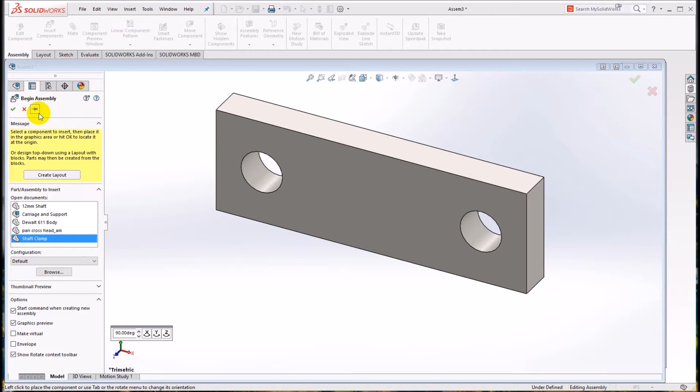The first thing I'm going to place is one of the shaft clamps, and a teaching moment here: if you want to place multiples of an item, see this keep visible pin. When I click to place one, it is still in placing mode, so I can put another one in. Notice the cursor changes, and I right click to complete the operation. So now I have two of those, and they're not oriented at all.

Let's continue the process. I'm going to insert a couple more components, the two 12mm shafts, and again click on the pin so I can get two of them without doing it twice. 1, 2, right click, and done.

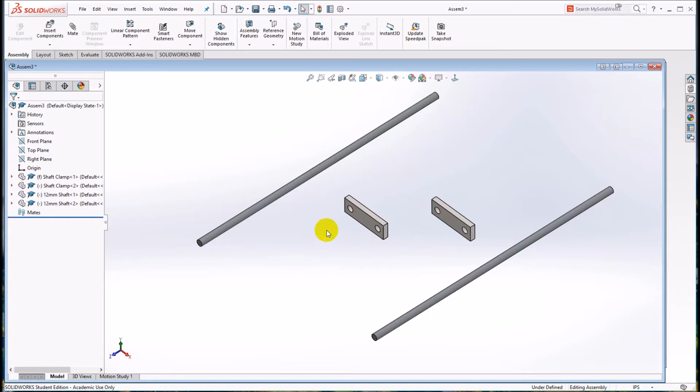So let's go ahead and create the first mate constraints. I know I want these to pass through the two blocks, and I want the blocks spaced out a certain distance from each other. Let's do the first block. I'll go into mate, scroll in a little bit, click on the outside, then find my way into the inside.

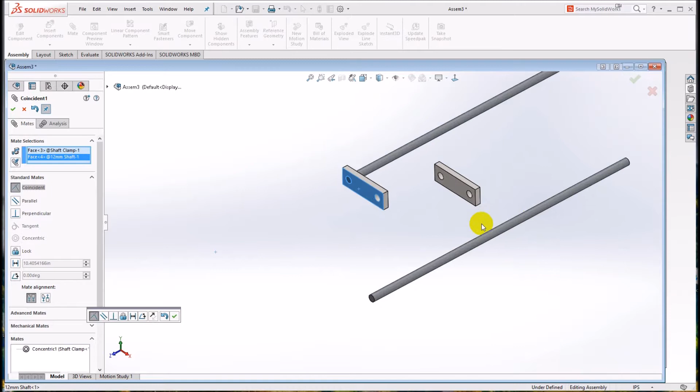Now they have a concentric relation, and I will accept that. It's waiting for me to do more. The next thing I want to do is make this edge coincident with the end here. They now are, I will accept that. Next, here with here - I don't feel I need too much dialogue here, you can watch as I do the operations.

Let's get to the end here. So now I have that part ready. Let's accept that and continue with the other end. Now, I know because I created this that the dimensions will work, but I want to work per the worksheet. So if we go to the second page, there's a distance relation between the insides - between the inside surfaces.

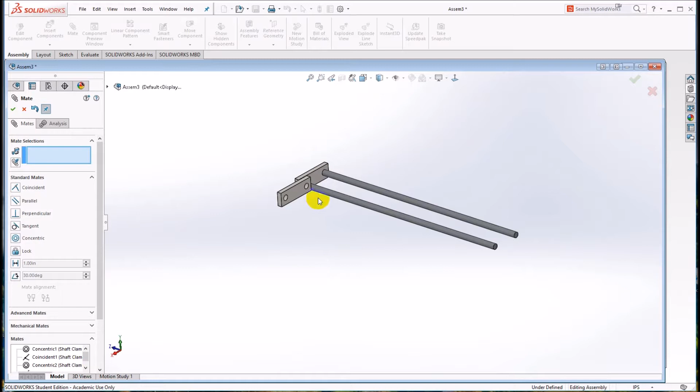First off, let's get the concentric constraint set up. That is concentric with that. I'll accept it - notice I can still rotate. That helps because now I can click on that, and it's lined up with the two shafts, but it's movable, which is fine.

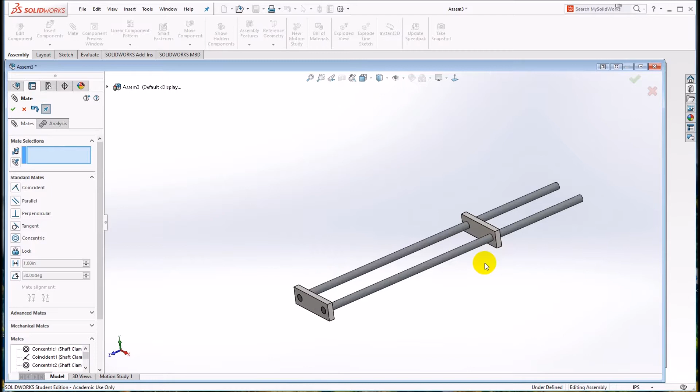Let's set up a distance constraint between here and here. Right now they start out coincident, and according to the worksheet it wants to be 488.95 millimeters, which brings it out to the end. So I've got a good starting point.

Let's continue with adding items we know are part of the assembly - there are the slide bearings to bring in. So let's go to Insert Components, and it looks like I did not open that already. I'll go find it, give me just a moment here, I've got to find it.

It's in my Google Drive. I've got to hunt it down. Apologize for the delay - sample assembly, and I should find the slide bearing down here. There it is, it's a SOLIDWORKS part.

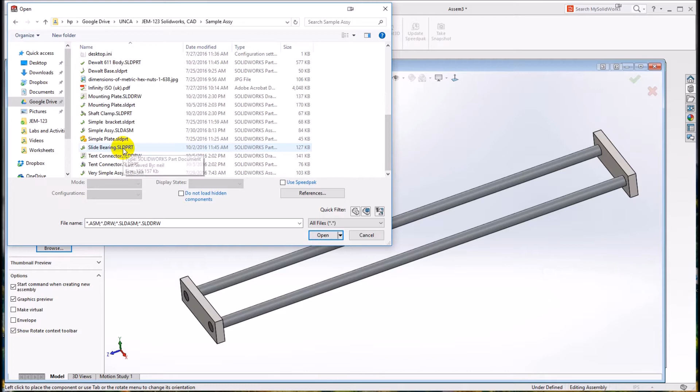Double click on it. Now again, I want 4 of those, so I'll click on the push pin. 1, 2, 3, and 4. Right click to finish - now I've got the 4. Let's start to constrain these on the shaft.

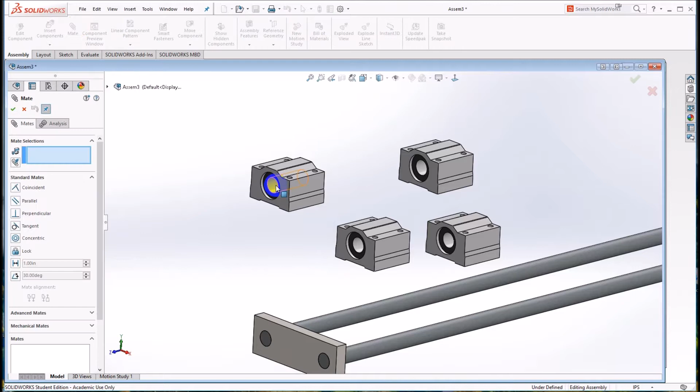So I click on mate, the inside, and the shaft. Now they're concentric, I'll accept that. I'll show you a shorthand for accepting in a moment.

Click on this guy, and the shaft, and notice I can choose other mate constraints. It happens that concentric is good, so I'll click on the checkbox. I'll show you one more accelerator, there and there - if I don't move, notice the cursor shows me the right mouse button will accept it. So I'll do that, and we got one more to do - that guy with that guy, accept it.

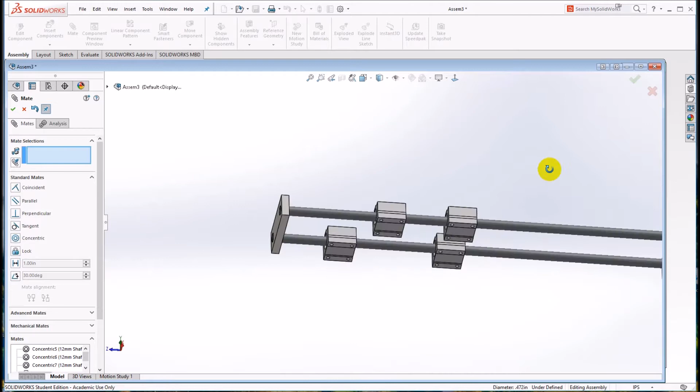So you can really work pretty quickly through this. I know that I want these all to be coincident - the face of that coincident with the face of that, and so on. I'm going to set that up right now. That with that, it's already selecting coincident. I'll accept it. This one with this one, right click. And this one with this one, right click. So they're all coincident.

So there's a dimension between the outside of the slide bearings, from here to here. Right now it puts them as coincident, but in fact I want a distance, a control distance, and that is 116.281. If you're wondering where these came from, they were probably English dimensions that I converted to millimeters.

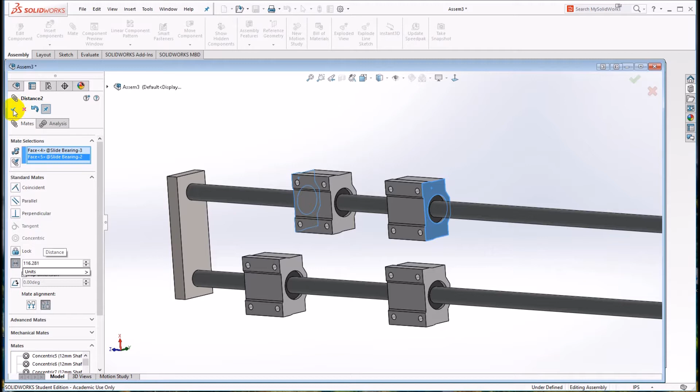So I'll accept that. Looks like I made a mistake - let's go back and fix that. Here we are, I neglected to say millimeters. So I'll go back and say mm. Should bring it back into the picture, which it does. So easy to fix error.

Now you might think that I need to now do the same thing with the bottom two, but by giving a coincident constraint between here and here, now they're lined up, and between the other pair, here and here, I'm done. So now, if I come out of here, they will move as a unit, so I've already got the first part of this assembly ready to use.

I'm going to stop here and then I'll continue in just a moment.

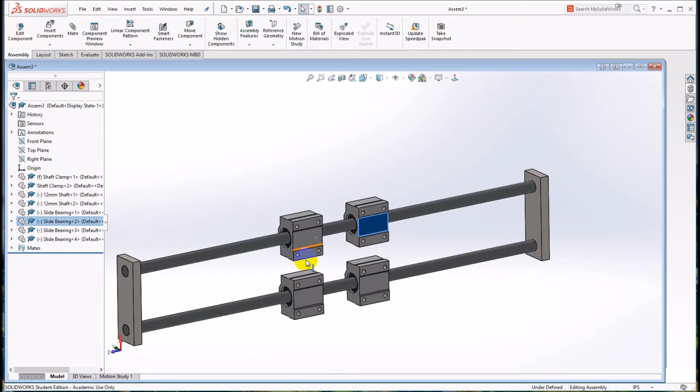Alright, continuing on, let's bring in the DeWalt router and orient it, locate it such that it is where it needs to be per the design.

I'll go to Insert Component, and there's the DeWalt 611. There's only one of them, so I won't bother with the pin. And of course it comes in oriented in a fashion that is not particularly helpful.

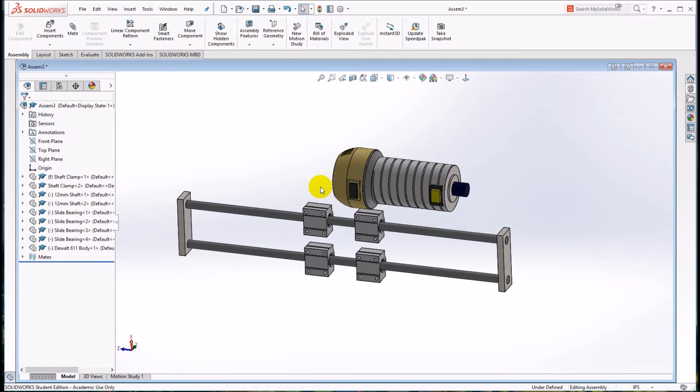There are any number of ways to get this located properly, so don't take what I'm about to show as the definitive method. It's just a method.

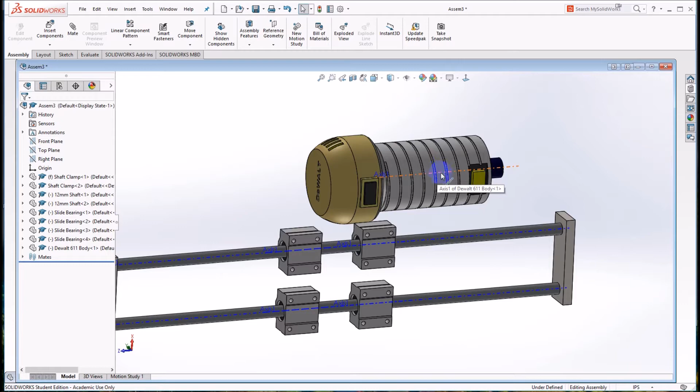Now if I go up to visibility, you'll see that if I turn on view axis, that in fact I can see that because when I designed these various parts, I put an axis. You can see it in blue here. There's an axis for each of the shafts, and there's an axis for the DeWalt itself. You can also see that there are some flat surfaces on here. There's a flat down here.

I think what I'm going to do is to start to orient the router so that at least it won't try to tilt on me when I do some of the things I'm about to do. So I'll go into Mate, pick one of the flat surfaces on the bottom, and I know because it's a fairly simplistic design that I want it to be parallel to the flat on the slide bearing.

I could have picked other surfaces. This is just a convenient one.

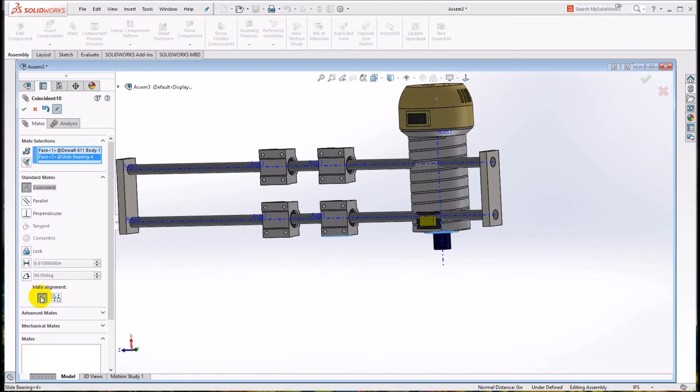Now let me change my mate alignment because it's upside down. I want it to be this way, and I don't want coincident. What I want is parallel. Sometimes SolidWorks undoes things, so there we are. We're there now, parallel, and that's all - no other control. So I'll accept that, come out, and you'll see that now I can move this.

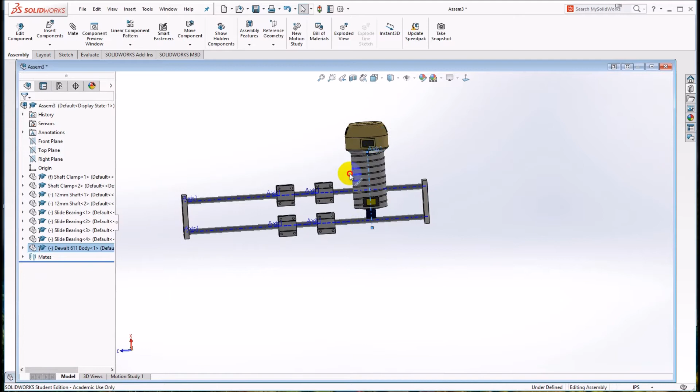I can move it left and right, pretty much any location I want to. I'll get it approximately oriented the way it ought to be. And I'll zoom in a little bit. You can see that it's kind of where it will eventually end up.

So let's add another constraint, again referring to one of the diagrams. It shows that the distance from the center line here to either of the axes of the shafts, for example, that there's a certain distance. It happens to be 57.150 millimeters.

So I will add a mate, and it'll be a distance mate. It'll be between here. I'll go right to distance, and I'll click on one of these. Right now it's just set for 1 inch, but I'll punch in 57.150 millimeters, and now there it is, located in a fashion that is useful.

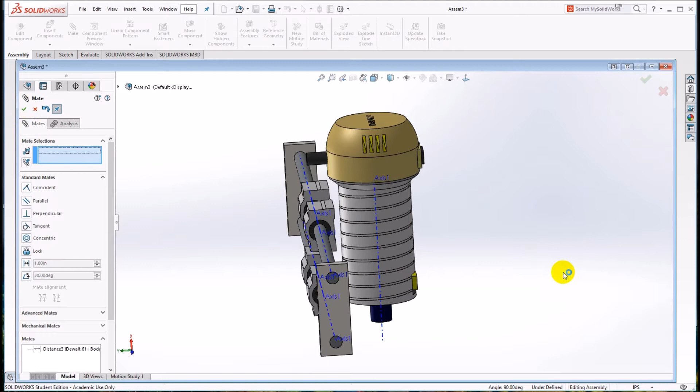So I will accept that, and I'm not quite done. I mean, there's a couple of other ways that this can move. You see that it can move left and right, it can move up and down.

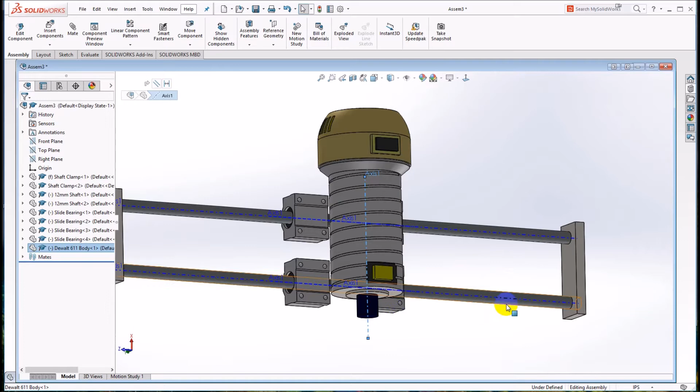I see that there's a vertical dimension of 93.142 between the upper shaft and one of the bottom flats, this big flat on the bottom of the router.

So I'll go back into mate, click on, I'm waiting for it, let's clear this, I don't want it automatic, and I'll click on this surface. That's one of my references. I'll click on distance, and it's the axis here.

Right now it's just 1 inch below, but what I really want is 93.142 millimeters, so I'll enter 93.142 millimeters, and I accept that.

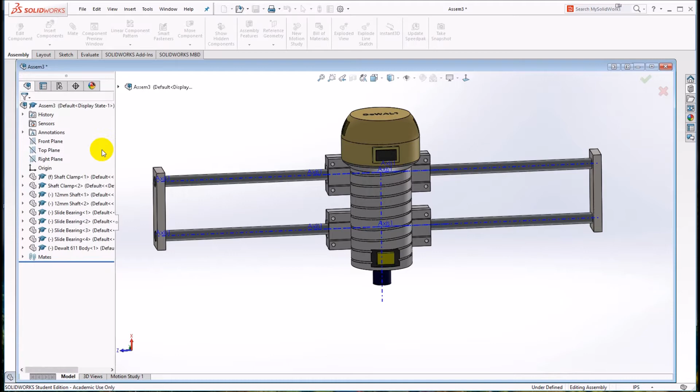So now I have a vertical orientation. Remember that there are several degrees of freedom. I haven't done the left to right, but I have the up and down, which is now locked. Notice if I try to tilt it, or move it, it just tilts, and I can't pull it away.

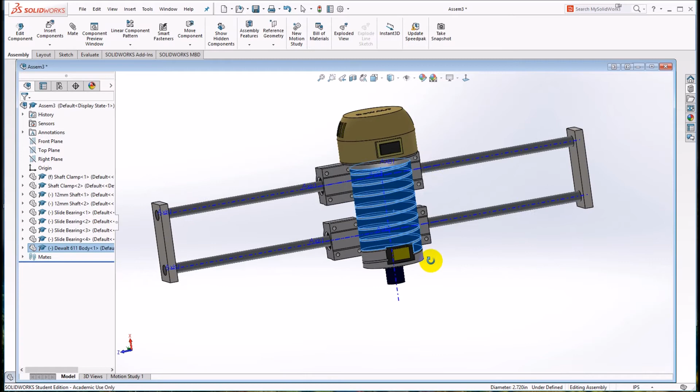So I'm nearly there. Here's where we begin to need a reference plane that bisects the slide bearings. So I'm going to go ahead and create it.

I'm in assembly. I'm going to create a reference geometry or a plane, and that plane will go, let me clear this out, I don't want anything in there. Alright, it'll be between here and here. So there'll be a bisecting plane, and that's useful.

I will leave it selected. Notice it's currently selected, you can see by the appearance of the handles. If you click away from it, notice the handles go away. In fact, I can't even see the plane at all.

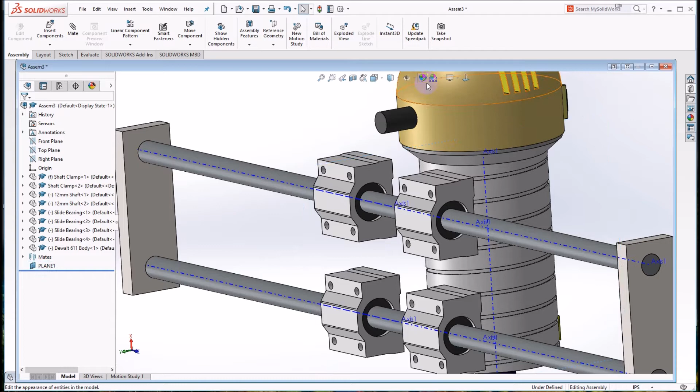Now I can find the plane over here in the feature tree, by clicking on it there. Or I can go back into the visibility section and turn on plane visibility, in which case every plane becomes visible. Let me turn that off. I think it was actually a little easier to just pick the plane here.

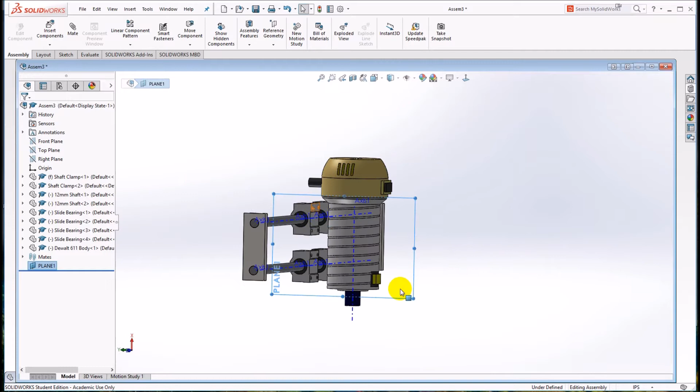So I've selected the plane, and what I'm going to do is to make that plane and this axis coincident, that axis lives on that plane. So I'll do a shift, left click, and up comes the accelerator.

I can do things. One of them is coincident, and that's the one I want. So I'll click on coincident. I don't know if you saw it, but it moved the motor, and so now finally that router is completely and accurately located, ready for creating the new parts.

So I'll stop again here.

This is an apt moment to remind you that in-context part information is saved within the assembly file. Therefore, you must save the assembly file now before creating any in-context parts. Otherwise, serious problems will occur, relations will break, etc.

Alright, continuing on, I have the router mounted as I want it, and I want to create a new part, the mounting plate that will be flush with and aligned with the slide bearing.

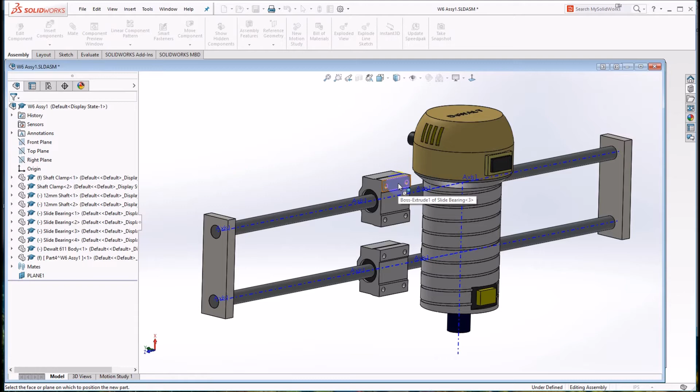So I'll go into Insert Components. Instead of inserting a component, I create a new part. And that new part will be referenced to this surface of the bearing. I click there, and now I'm ready to start the sketch for that new part.

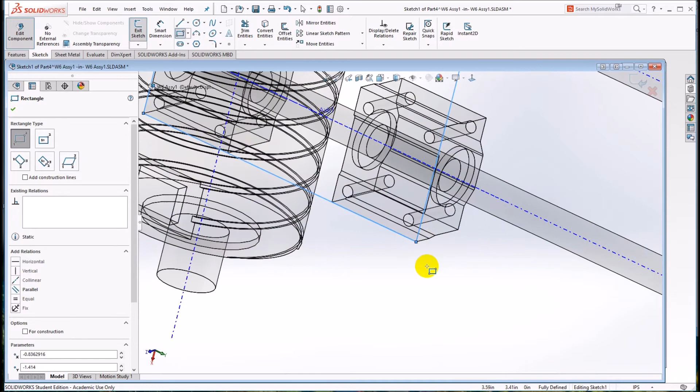So I'll click on rectangle, and I'm going to align it with the outer edge. I click once and start dragging. I can rotate around, get myself oriented, and make it align with the lower right corner. Click again, there's my outer extent of the rectangle.

I'll accept that. Let's convert some entities. I'm going to convert all of these holes, all 16 of them. Takes a moment. There may be a more efficient way to do it, but this is not too bad.

Get all 8 on that side, and then come around and do the same thing over here. Notice I'm converting entities, and they're accumulating in the list on the left. Each one I click on shows up in the list.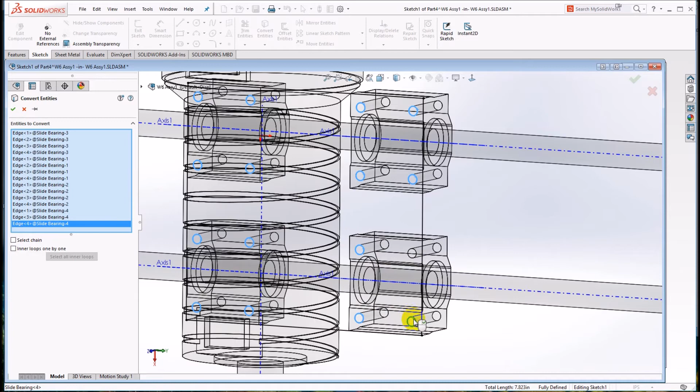Alright, a couple more. So now I've done that. I will allow that to be the sketch. So I have an outer rectangle and the 16 circles.

Let's finish the sketch, and I'll go up to Features up here, Extruded Boss Base. Let's find that sketch in the list down here. Notice the feature tree moved out into the working area.

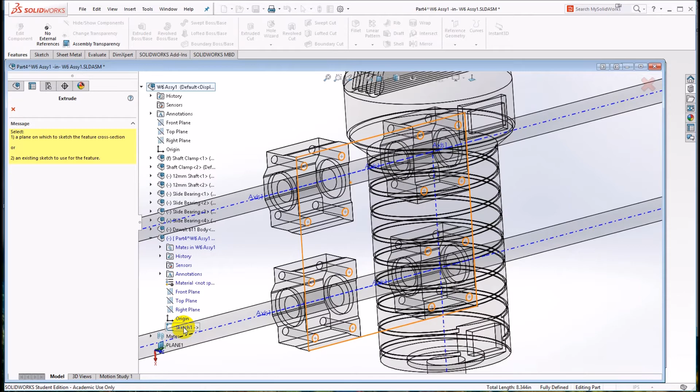Click on Sketch 1, and I'm going to punch in the depth that I really want. Again, referring to the document, it's 5.080 millimeters.

I will accept that, and there I am with the beginning of that new part. I'm going to come out of the part for a minute to look at it in context, and before going any further, I want to save my work.

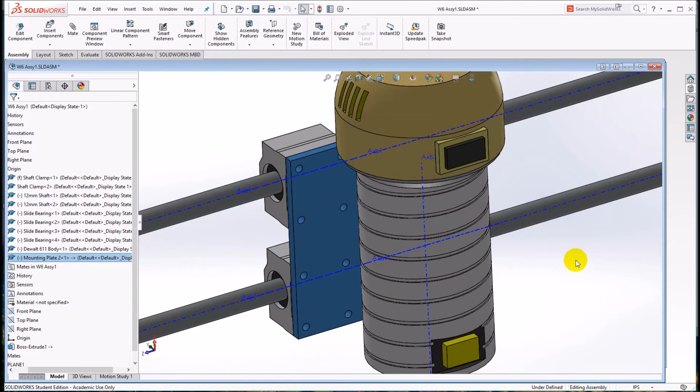Right now it's called Part 4, an incrementing name. I'm going to right click on it and rename the part. I'll call it something to avoid conflict with names I already have for parts, so I'll right click, rename part, and call it Mounting Plate 2. Press enter, and I'll right click on it to save it in an external file. Now it's ready and saved.

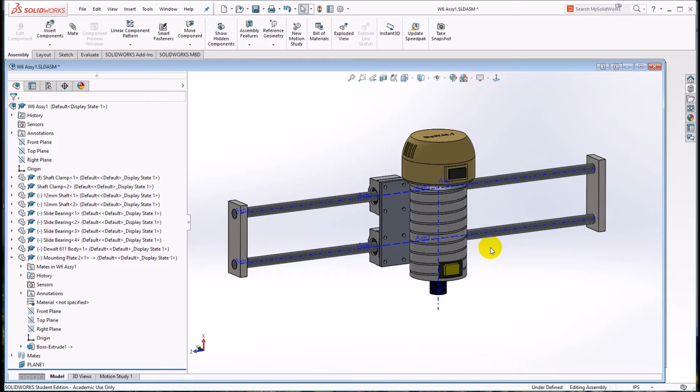I assume that this was not too complex, so let's pick up in a moment. Now we're ready to begin developing the feature that would support the router, the shelf. Let's go ahead and do that.

We've already got the router positioned, and we've got a base plate. Let's create that shelf. I'm going to declare that I want the upper and lower shelves to be aligned with the upper and lower shaft axes.

I will create an axis, a reference plane. I've clicked on the axis, now I'll click on the top surface and make it parallel to that top surface. Oh, let's fix that, delete. I clicked on an edge, but what I really want to click on is that surface. I'll make it parallel to that.

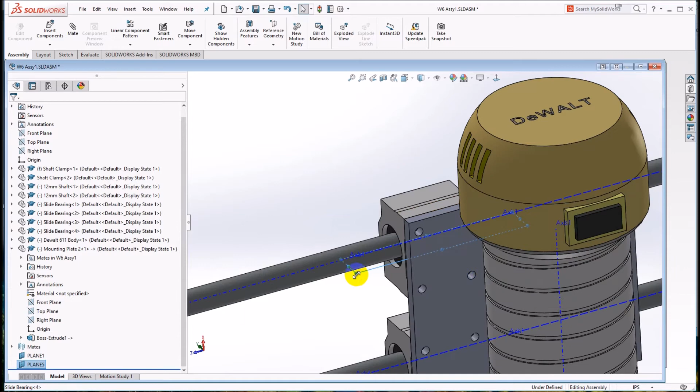Now I have this reference plane that cuts through the center of that shaft, and that's where I want my upper shelf to live, centered on that. So I'll right click and edit the part, and now I'm ready to do some creation of that feature.

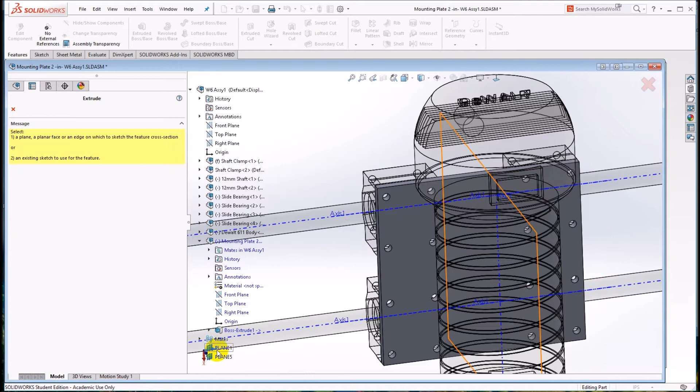I'll go into Feature, Extruded Boss Base, and click on that new plane I created, right here, and convert some entities. I know I want it aligned with the front edge, so I'll convert that edge and a line appears. I also want to cradle the router, defined by the periphery - this circle is a convenient reference, so I'll convert entities of that circle. Now I've got both the circle and the line.

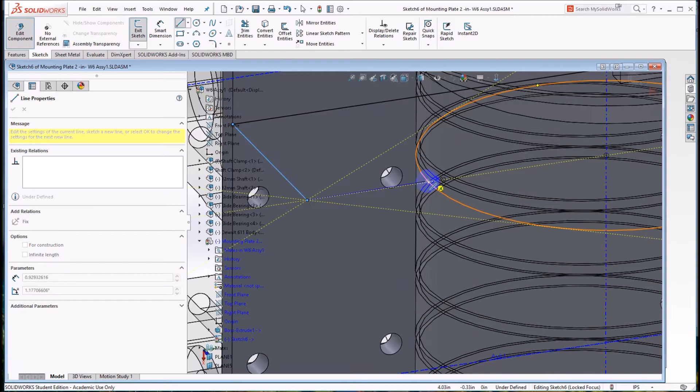Let's create some additional geometry to finish that up. I'll create a line, starting it in the corner over here - notice it helps me, and if I zoom in, you can see a dotted blue line appear as I move down, which is in line with the center of that circle. So I'll click here, go over to the circle, touch off there, double click to finish it. Now I've finished the left side.

Let's do the same over here on the right. I'll start my line, come out, find my dotted blue line, there it is. Come over to the circle, find my point there, double click, and now I've finished most of that geometry.

I do need, however, to trim the circle that's out here. See that circle? I only want half of it - the inner half, not the outer half. So I'm in trim, drag across, it goes away. I'll accept that, finish the sketch.

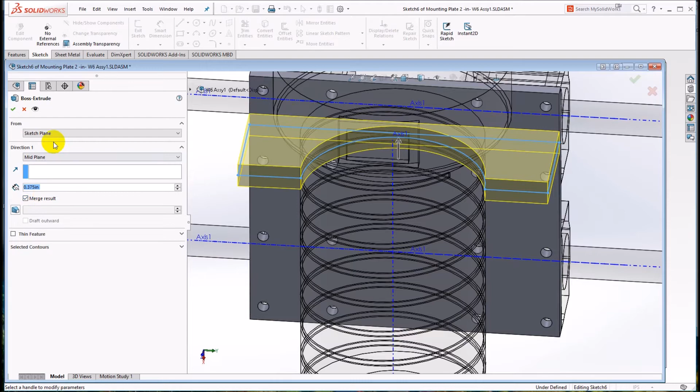Now I'm back in my extrude mode, and I want the thickness to be, reading off the sheet, 0.375 inches, and I want it centered - mid-plane, centered on that plane. Now here I am with the upper shelf conforming to all of the features of interest.

I'm going to finish out, and in the next little section I'm going to show you how to mirror that feature around the center of the part.

When we want to put the second shelf on, we could simply repeat everything we just did, but that's wasteful, particularly since the bottom shelf, other than its location, is identical to the upper shelf. Instead, let's open up the part and take a look. There's our upper shelf. I'm going to declare that I want this to be repeated, mirrored around the center of this entire part. I believe that will work fine.

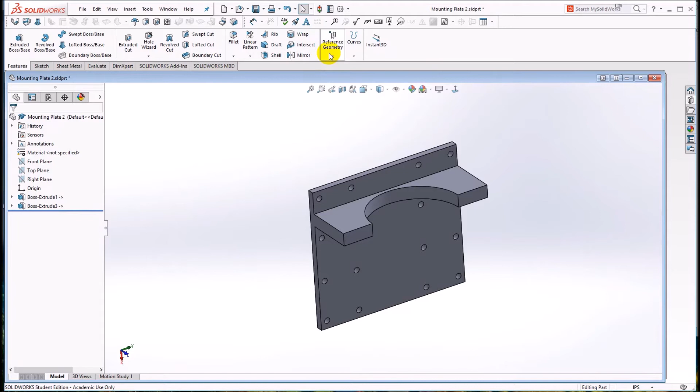I will create a reference geometry, a reference plane, which bisects the part, and that will be my mirroring plane. Click on top and bottom. There's my new plane.

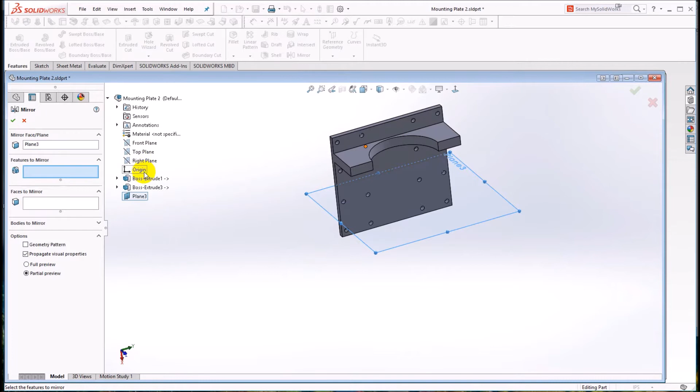Let's make it a little bit bigger for visualization. If I click away, that's fine. Let's mirror around that new plane. I'll click on that, my face plane, and the feature to mirror is the latest boss, this guy right here. You'll see it shows a preview. If I click OK, here I am with an upper and lower boss.

If we go back to the assembly, it will update it. And there, in fact, you can see that it is looking pretty good.

So about the only thing left to do, other than color, to this part is to add the 4 mounting holes. Let's do that. I will again go back to the part. I don't need to reference anything right now because these are independent rather than dependent in a way. I'll do an extruded cut on this surface.

I'll do a center line. Notice I can find the center line quite easily of that edge. Draw straight down, and let's create a circle based on the middle of that line, which will be the middle of the entire feature.

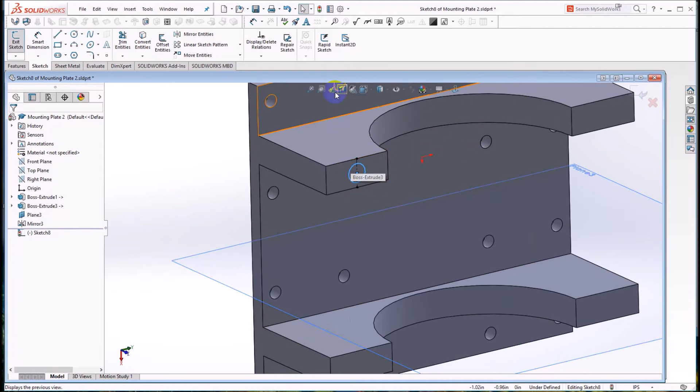You might be wondering what diameter I should use. This would depend very heavily on the hardware in question. Generally, what you would do, and this is true for assemblies where you're using a screw, is you'd want the outer hole, the one the screw passes through easily, to be a clearance diameter, and the one it interferes with would be either threaded or small enough that the screw itself would cut the thread. Because this is a simplistic exercise, I will simply go back to here and repeat the diameter.

This is okay for right now. So I'm going to evaluate. Notice I have tabs—I click on evaluate, measure. I'll click on the circle. It's showing the diameter to me in millimeters. I could also see it in inches if I chose.

If I click on here, click on inch or millimeter—let's say I want inches to be my unit. It'll show me the diameter in inches is 0.166 inches. Okay, I'll close this window.

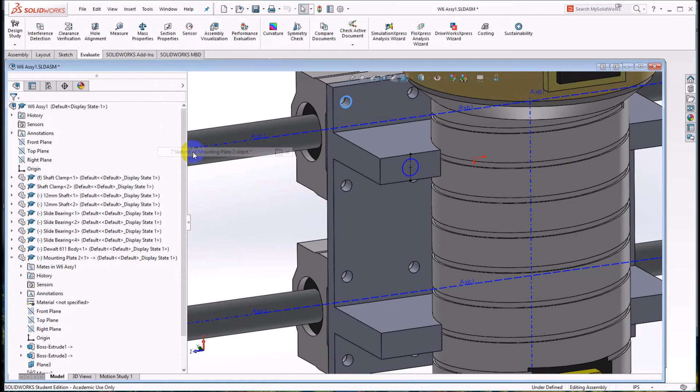Let's go back to the part now. We're still in the sketch there, and I'm going to dimension that circle. Here we go, and we'll make it 0.166 inches in diameter. Looks good. I'll accept that. We can extrude all the way through.

For right now, that'll work fine. I'll go through all, and we have our first hole. Just like I mirrored before using this plane, I could mirror that hole. In fact, that's what I'm going to do, to keep my life a little simpler here.

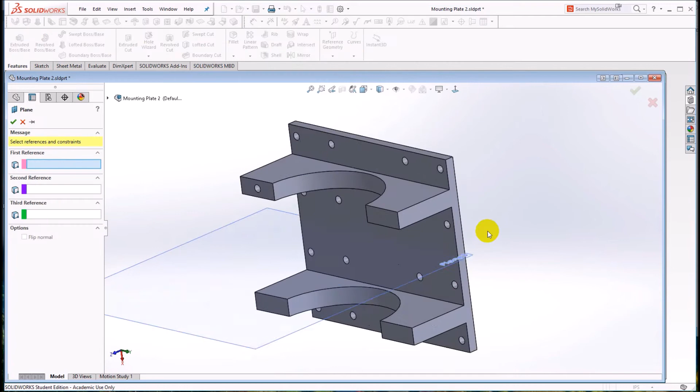Let's create a vertical plane as well. I don't think I already have a plane like that, so let's create a reference geometry, a plane which is a vertical bisecting plane between here and here. So now I have the part bisected in both directions.

And I will do a mirror. Let's click away, we'll mirror—this be the plane, the feature is the hole. So there I see my bottom hole. Alright, so now I have the two holes mirrored around the horizontal center.

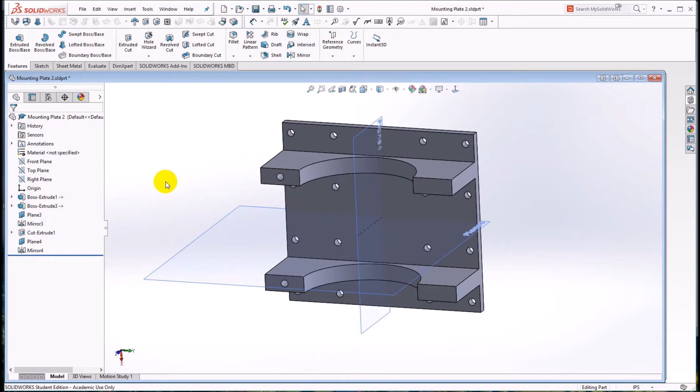Let's do the same thing for those two holes mirrored to the right side. So we'll click on mirror one more time, mirror around this plane, and we'll select one hole and then the other. Accept that. So now I have my 4 holes all the way through, usable for creating my clamp.

If I go back to my assembly and it updates, so now I have the assembly waiting for the additional part. Before we finish, let's change a color. I'll change appearance for the mounting plate—I can do this right inside here, and it looks like it wants to be some kind of bluish purple.

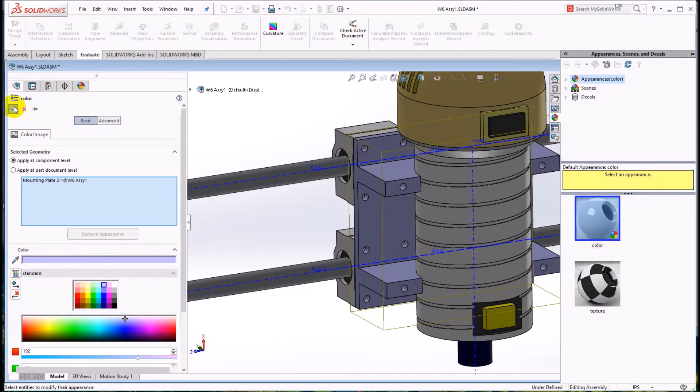That works for me. Maybe a little more blue. Yeah, I think I like that better. Okay, there we are. So now we've done the color, and we're ready to move on to the mounting clamp. I will stop here.

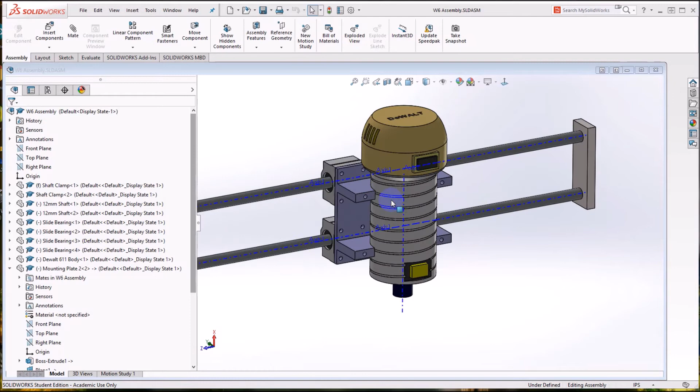The last part to be added to this is the clamp, and that will be placed around the front of the router with an intentional gap of 1.270 millimeters from the mounting face. We'll create one and then use a duplicate for the bottom, so we'll create one on the top. Go into Insert Components, New Part, and this will be related to the top surface, and if you look at the geometry, it becomes clear why.

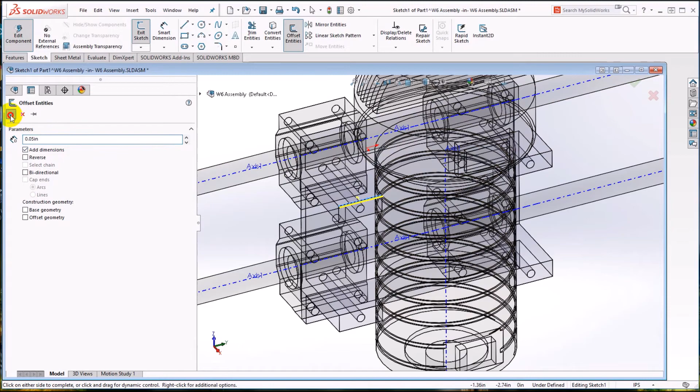Here we are now in the new part, beginning to edit it. The first thing to do is to create the gap. There are other ways to do this, but I will use offset entities, and I'll offset the front surface out by 1.27 millimeters, and do the same thing on the other side. It will retain that number for the next operation, so I don't need to punch it in every time. I'll offset entities again.

Again, this front edge, accept that. And as before, we'll use the periphery of the router body, just a simple convert entities, which is this circle up here. Accept that.

So now I have a circle and 2 lines, but what's interesting is that they don't actually touch, and that makes sense geometrically because even though it's a slight offset, that 1.27 is enough to cause a measurable, calculable gap. You see the gap right here between that point and the newly converted circle.

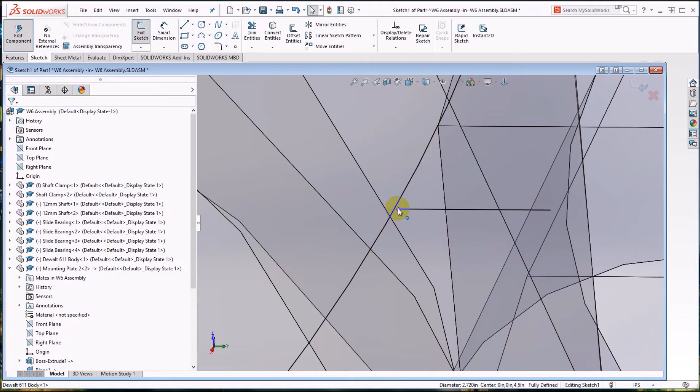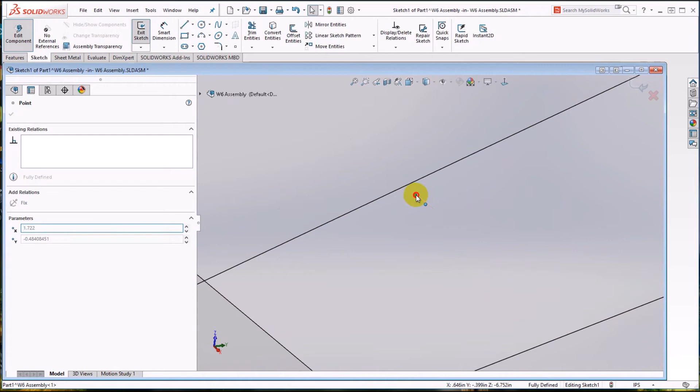So we need to drag that point over to be in contact with it, and it takes a moment for it to accept, but there we are, I've dragged it over. I'll do the same thing on the other side, because if they don't intersect, it won't be able to complete the extrude operation, since it's an incomplete area. So there we are, I've dragged that over too.

Let's continue. I'm going to create now the wall thickness of the part. I can do an offset entities again from here. Let's see if I can include the circle. Yep, I sure can, and I'll include the other line too, so the 3 here.

And the amount of offset, now we're looking at the wall thickness, and it's defined in the document as 5.08 millimeters. Let me make sure I have that right. Yeah, 5.08 millimeters. And so now it's extending out its offset from those 3 surface lines.

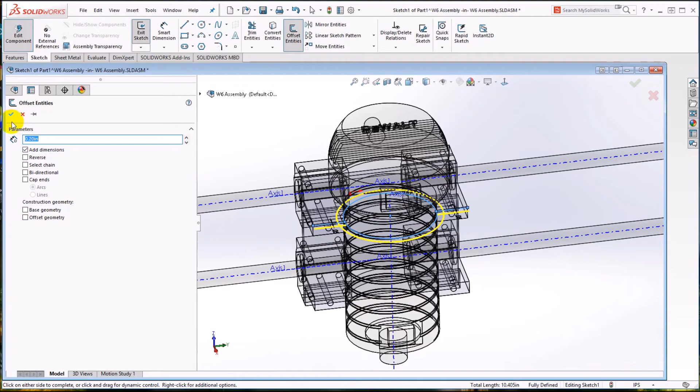I'll accept that, and now we have a little bit of cleanup to do. We've got some extra lines. Let's finish the outside though. These 2 points need to be connected, and we've got the same thing on the other end, those need to be connected. So I've done that.

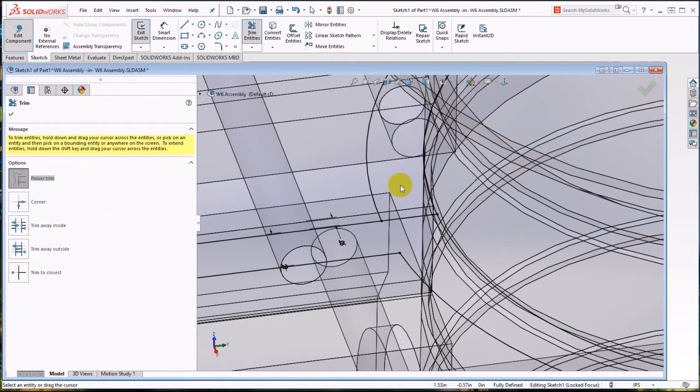Let's finish up by cleaning up. I'll go into trim entities. I want to get rid of that and that, here and here. So now I've got a clean transition. I'll do a similar thing on the other side, clean up that and that. And here we are with a fully closed area.

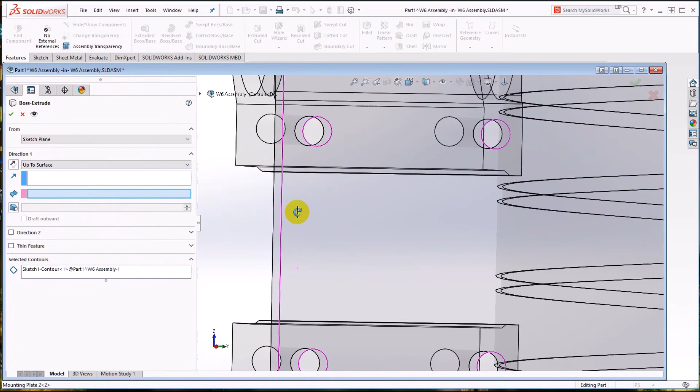I will accept that. I can come out of the sketch, and now we have something that can be extruded. This extrude will want to go down as far as the bottom of the protrusion of the other part. So I'll go into Features, Extruded Boss Base. It's this, we'll go up to Surface. I will choose the surface I want it to go up to, which is the bottom here. And with any luck, there is the beginning of our part.

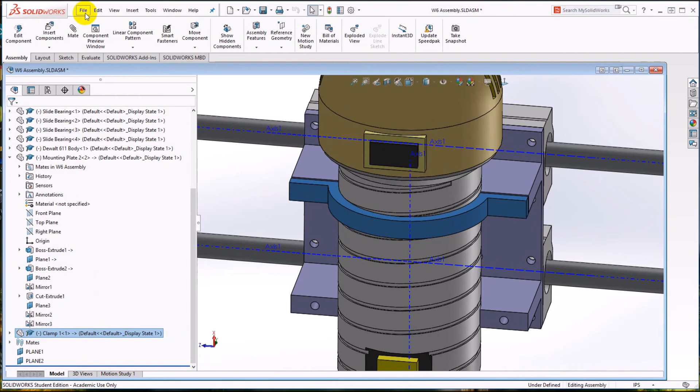And we can go back to the assembly. Now before I go too much further, just as before, I want to give this part a name, and I want to save the whole thing so I will not lose my work no matter what happens. So I'll rename the part, we'll call it Clamp 1, and save it in an external file. In fact, let's do a file save all, that way the assembly is saved, all the parts are saved.

Okay, now that we have this clamp, I will open the part. Let's give it a color. What I've learned is that if you apply a part color within an assembly, it's true only in that assembly, whereas if you apply it at the base part, it travels with it no matter where it may be used. So that's something interesting to know.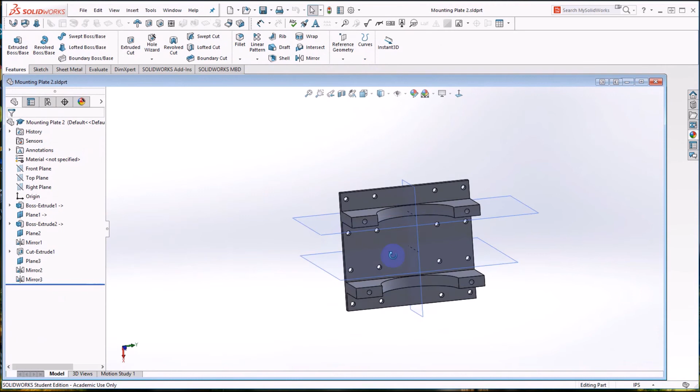We'll go to Appearance, Clamp 1. I will select a green color, much like the example in the worksheet. Go back to my assembly, it'll update, and sure enough there it is, green. Just for reference, let's go back into the part here and we'll see the same thing. Remember, I had applied a color out in the assembly, and it did not travel back through the part.

So let's do that here. We will do a right click again, Appearance, and let's give this that color we gave it before, which is that kind of purpley blue. Okay, and we'll go back to the assembly and we're good to go.

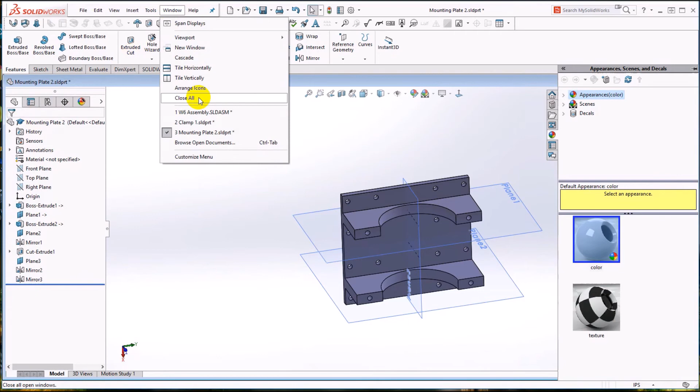Alright, so now we have this clamp, but it lacks the holes, and these will have to be done in context because otherwise I won't know where they go, and I do not want to apply numeric dimensions. So let's do an edit part here, and we'll do an extruded cut on this face. We will do a convert entities.

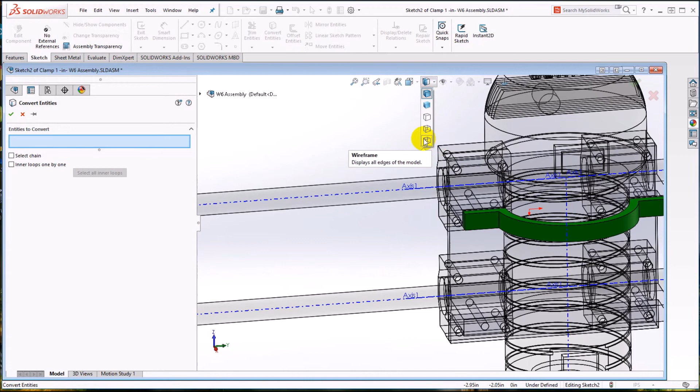Here's another learning moment. You can change how the view is presented. Right now it's shaded with edges. If I switch to a wireframe presentation, that enables me to choose features that might otherwise have been hidden. I was having trouble getting to this circle, but in wireframe mode I can get to it, so I'll click on that and go over to the other side—it's much easier now. I'll click on the same thing over here and accept it. Now it's projected to the front surface.

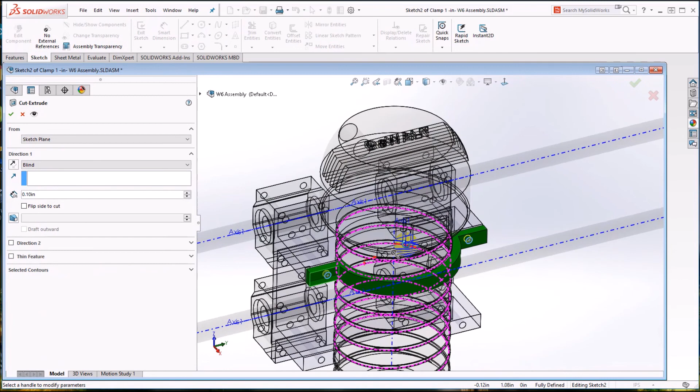Let's go back to shaded with edges. Okay, so now we're back where we were a moment ago. I want to finish the sketch, and I'm going to allow it to cut all the way through. Now we have the two holes ready for screws that can be placed into them to hold it together.

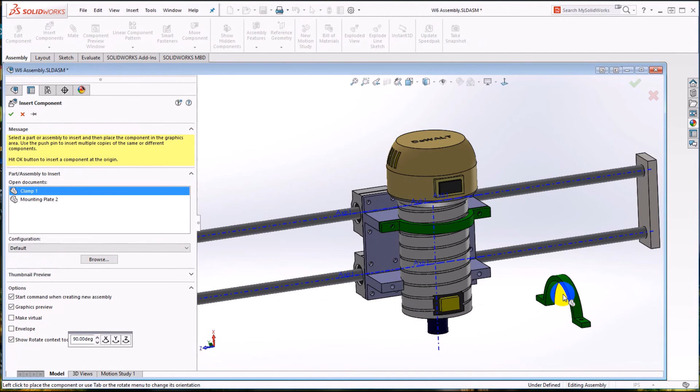We'll come out of part editing altogether, and let's insert a second instance of that clamp. I'll go to Insert Components, Clamp 1, here it is, and let's start mating it. Okay, there to there, good. Let's do bottom edge, bottom surface to bottom surface.

Okay, did I get that right? Nope, it's below it—let's flip that over. That's better, okay good. Now we can bring it over to be in alignment. We'll do that edge to that edge. So now we have complete alignment.

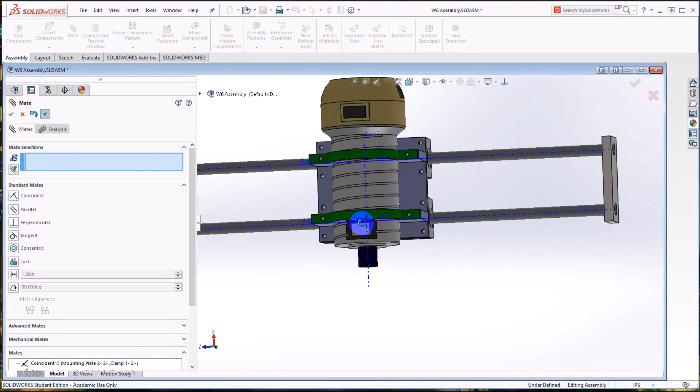Let's do a file save all. Don't want to miss the opportunity.

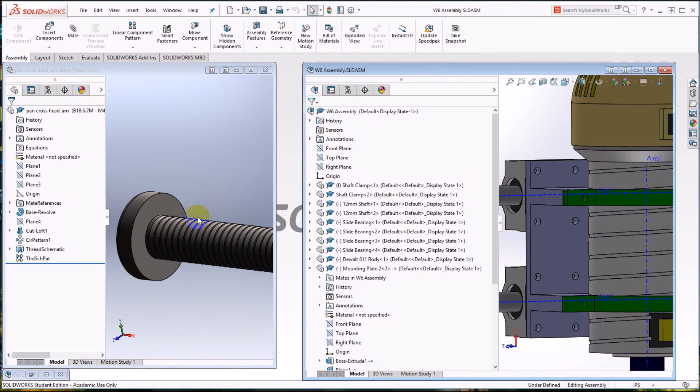Alright, I've placed the two parts next to each other. That is the screw that's going to go in the holes. I've sized down the window a bit because I can zoom in and pan around as much as I want. So let's start dropping the hardware in—I think I showed this in one of the other tips videos. I'll drop a screw in, and do it again and again. We've got several to do here.

Because of the automation—this is one automation again that I do like—you can populate the hardware very quickly. Here we are, we're nearly done.

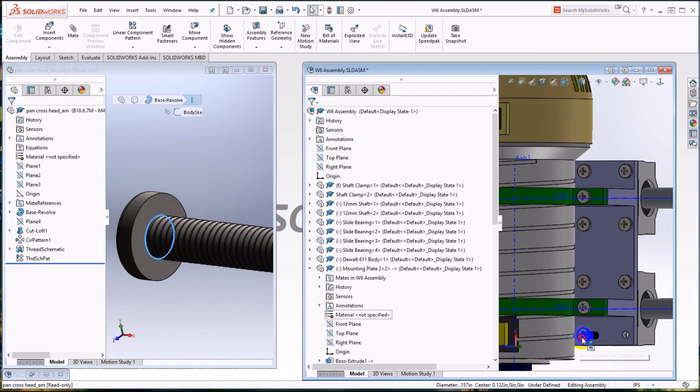I noticed that I had not yet added the fillets to some of the new parts, so we'll do that in just a moment. But first I want to save what I'm doing here just for safety's sake. Add a couple more—1 and 2. Okay, we can re-maximize this window.

Observe that all the hardware is now in place. Let's do a file save all. Rebuild and save—yep, that's what I want.

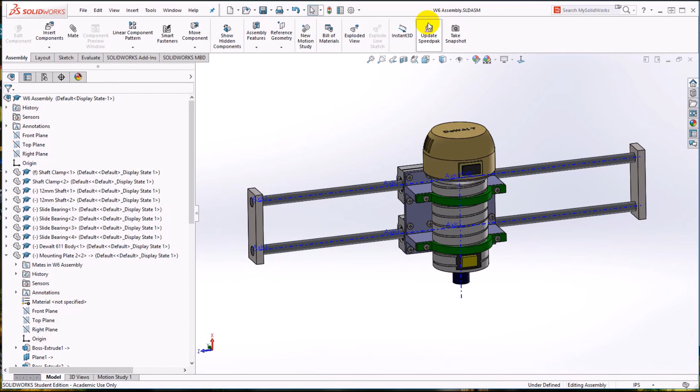Let's continue a little bit here. I'm going to open up this part and add a couple of fillets to it. If you notice in the worksheet, it talks about wanting a fillet—let's see what the numbers are. Fillets are added, they're all 0.1 inch radius, and they're not everywhere, just a few select locations.

So I'll go up to Features, Fillet. It's already 0.1 inches. We've got one there, one on the bottom, top and bottom of both of the shelves. So I think that's the fillets for this guy.

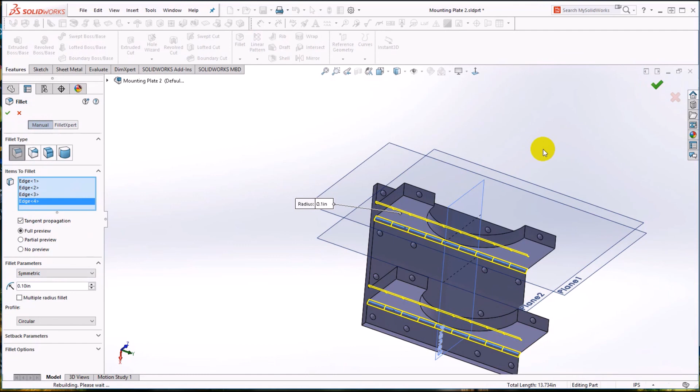Again, let's save. File save. We'll go back to the assembly.

Alright, let's see—models have changed. Yep, I want to update it. Alright, so here you can see the fillets.

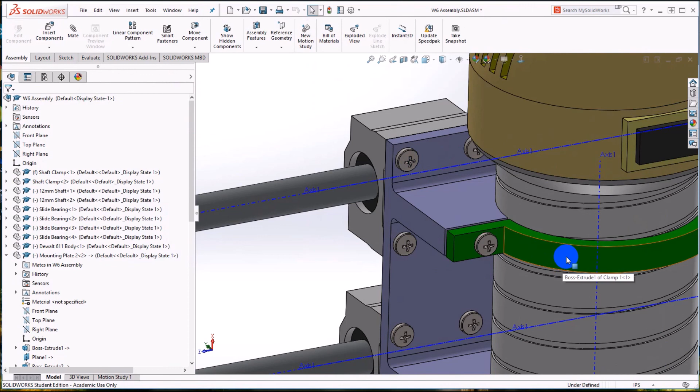We have a couple of fillets to add to the clamp, which I'm doing right now—same diameter or radius, so go to fillet. These fillets help reduce the likelihood of cracking or breaking. They get rid of some of the stress concentrations on those interior corners. They're not cosmetic—they actually do have a functional purpose.

Alright, so we've updated the assembly. Let's do a file save. Yep. So now I think we're there—confirm that it still moves, and it shows all the features that are supposed to be in it.

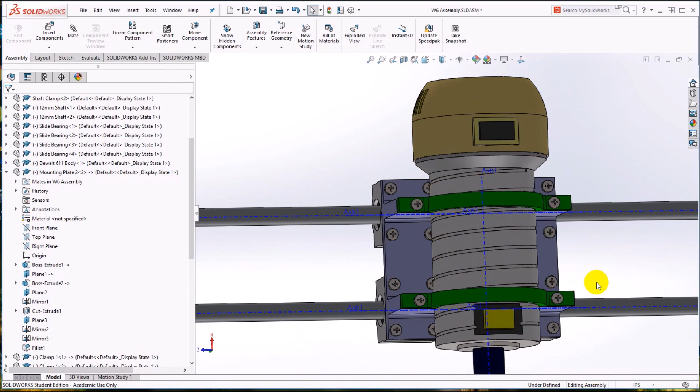I think I've got the coloring right now, and I think this concludes the demonstration of the Worksheet 6 creation.